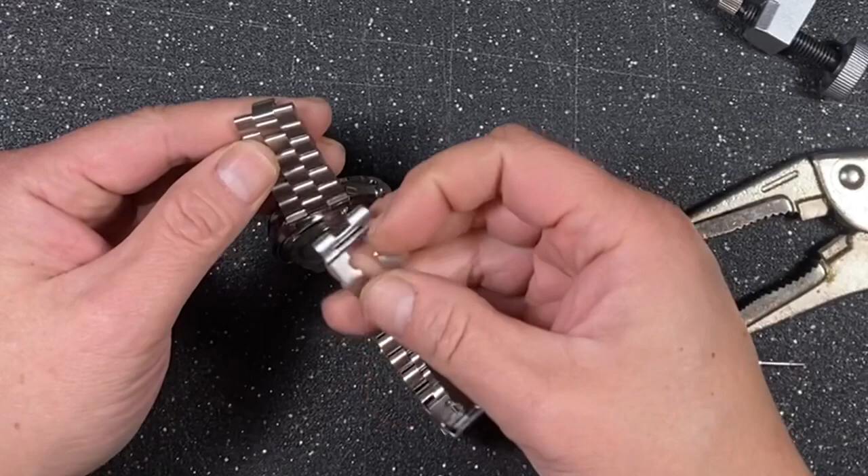Alright, so time to put it back. See, which way was it? Oh, I can't remember, do you guys remember? I'm guessing we slide it in this way. We'll see what happens. Does this look right? I don't know. I don't have a mallet, so I'm just using whatever I happen to have. Not in all the way, but we'll see. Now let's see how this is.

I could have it be a half link over this way, but it's not totally necessary. Let's see how many links to remove from this side. What do you think, guys? 2 links, or remove 1 and do a micro adjust? I'll remove 1 and we'll see how that goes. Just 1.

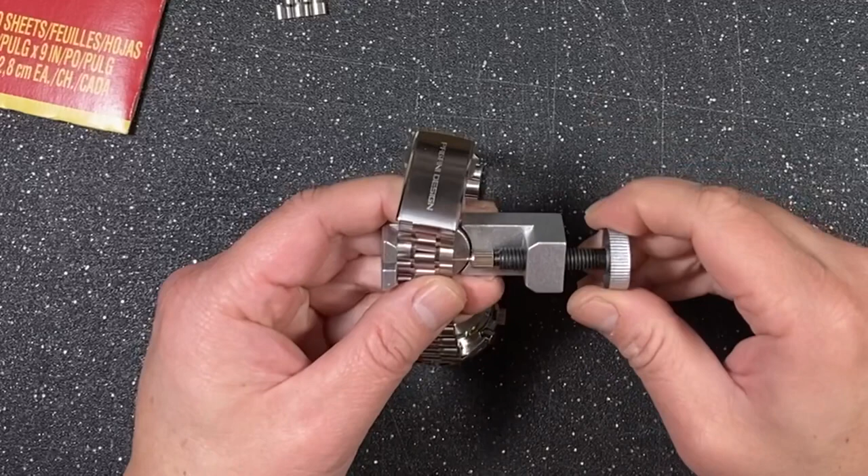Now the real Omega watches have a different system, so what you're looking at only works for this particular watch. Don't be like, hey, I can do it like this to the other watches—no, every watch has its own system basically. So you gotta pay attention to how it is fastened.

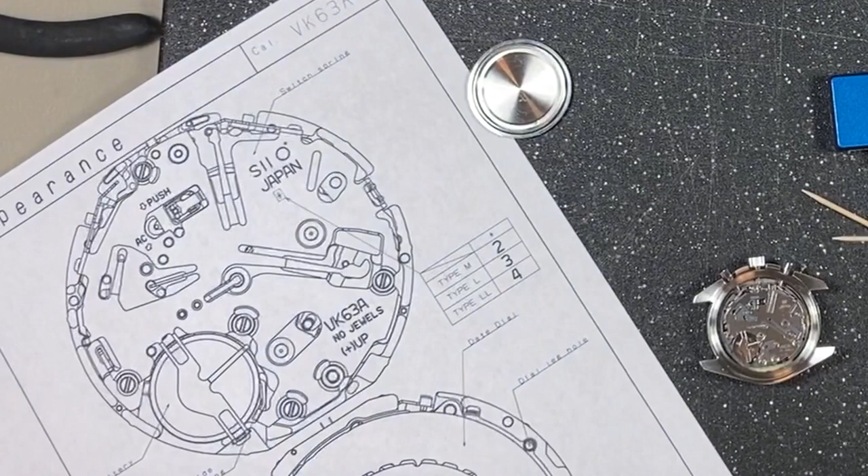So I'm looking at this here. It says push here, all right, let's give that a push. I see now, okay. Push it, push this way here like so. There we go, needed the loupe.

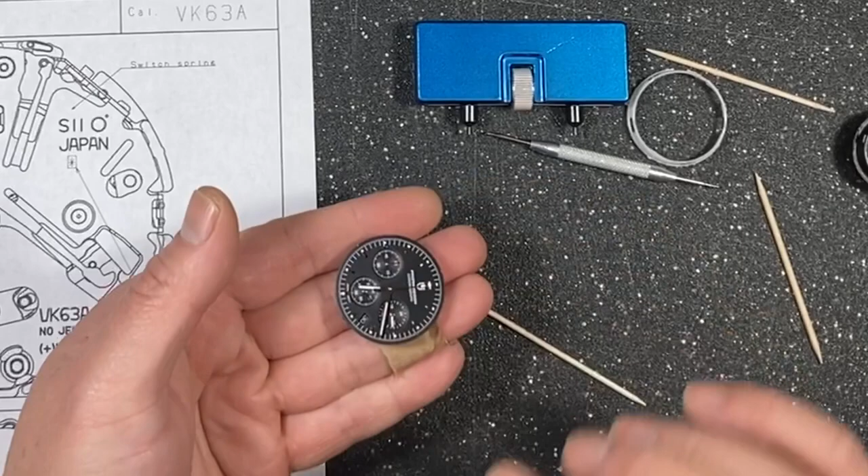Now because of these pushers right there, we're going to lift this side up first, and put it in this way. Now I'm not going to talk to avoid spitting on it.

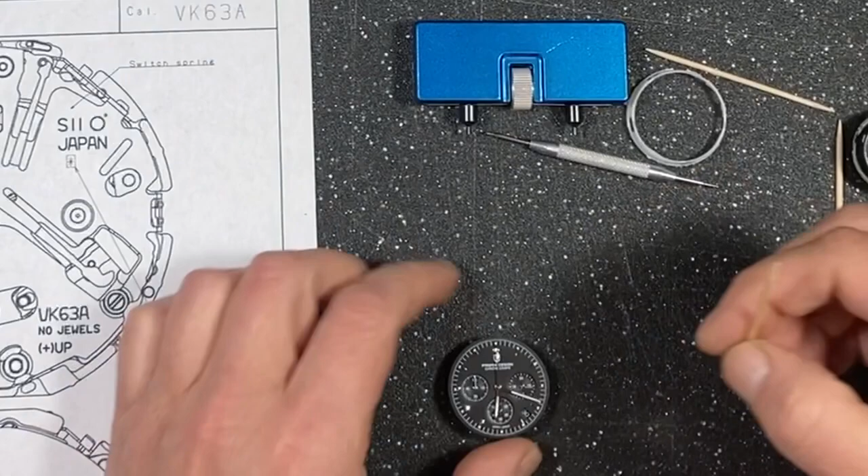Okay, this is not the type that you can just push over a little bit. So, you know what, I'm just going to leave it like that and put it back in.

Get it past the chrono pushers. I think the proper way would be to remove the hand, reposition it, and put it back down. But I don't want to do that, don't want to risk breaking it.

Put the pin stem back in. All right. Make sure there's no dust. Looking fine. Yeah, whichever. Now, had this been an Omega, I would have inspected it thoroughly and refused this for not being proper.

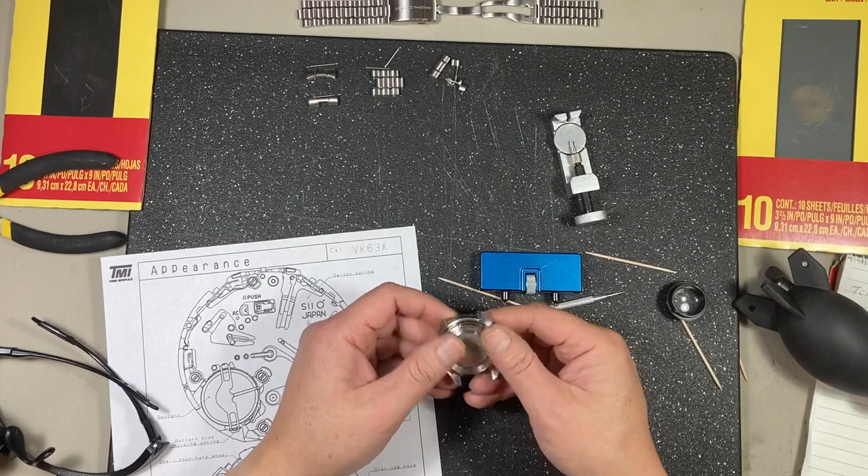Now, when sealing a case back, be careful not to cross thread the threads. You're going to want it to seal and go on smooth like this for many turns. Then you feel it kind of smooth out when it hits the gasket, and then you tighten it up with your tool.

Now the actual important part of this whole video is that we gotta make it wearable. So with all these really sharp edges, we're gonna tone it down with some 800 grit sandpaper. They're not expensive, you can get it at any hardware store.

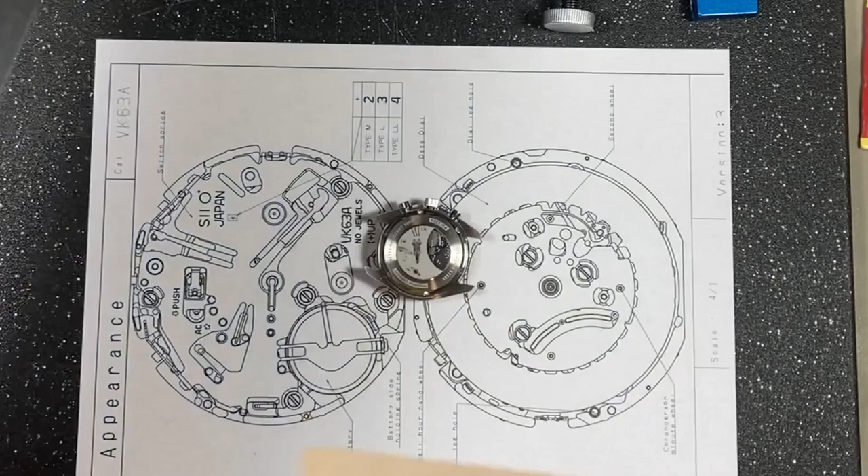Just gonna fold it over once or twice, a bit like such here, and just go over the edges. So you want it to be crisp, but not sharp enough to cut you. Just dulling it down so it doesn't feel sharp, and that's it.

No need to put a big smooth edge on it like some people do. They just make it way too smooth, and it loses the crispness.

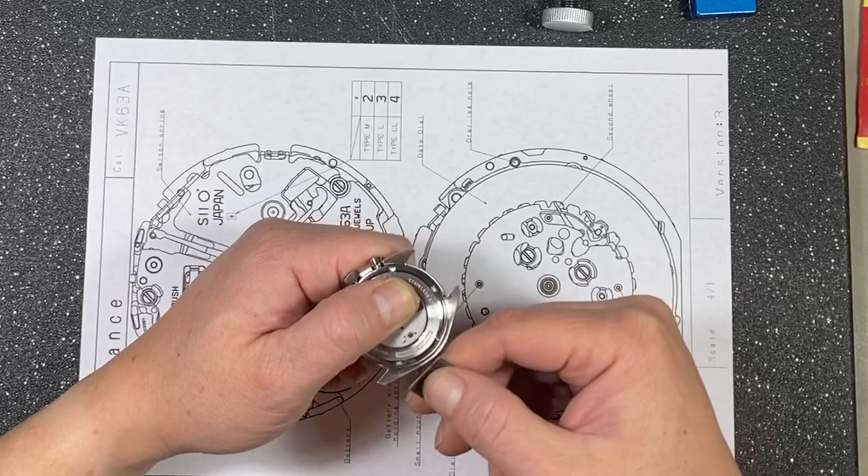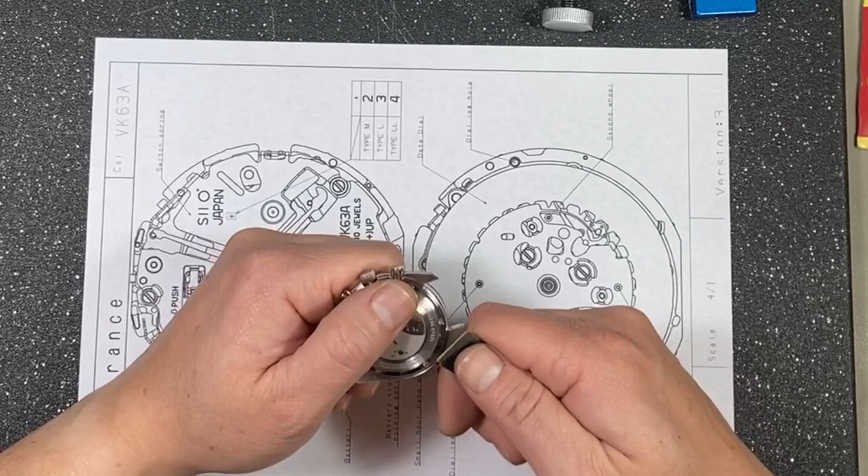It's okay if you slip now and then and scratch up the finish, because it just gives the watch more character. After all, you're doing it yourself. But if you're paying someone to polish your watch, I would be upset.

Okay, feels crisp, but not cutting my finger, that's what I'm looking for. Now this side's going to be a challenge because of the pushers.

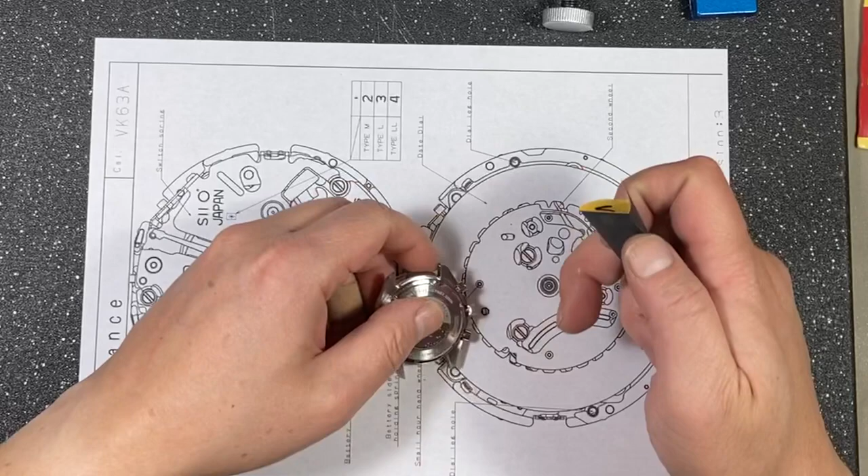Now in between is going to be a little tough, so I'm just going to fold a little edge like this to get the little in-between spot there.

Yeah, imagine how much you'll have to pay for this watch if the people who made it in China actually took the time out to do all this. Maybe $10 more, you know?

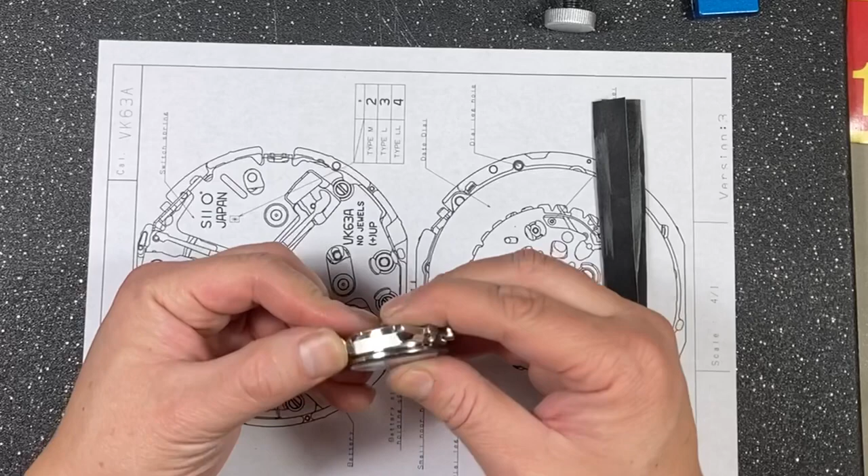Now let's feel the top. Top and sides feel okay, nice and crisp.

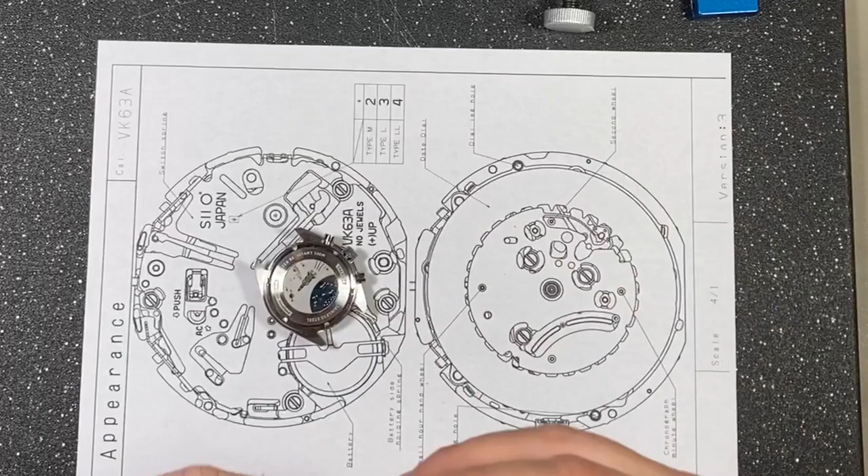All right, so now we're gonna move on to 1500 grit, just to refine the edges that you just finished doing here, make it even more smooth.

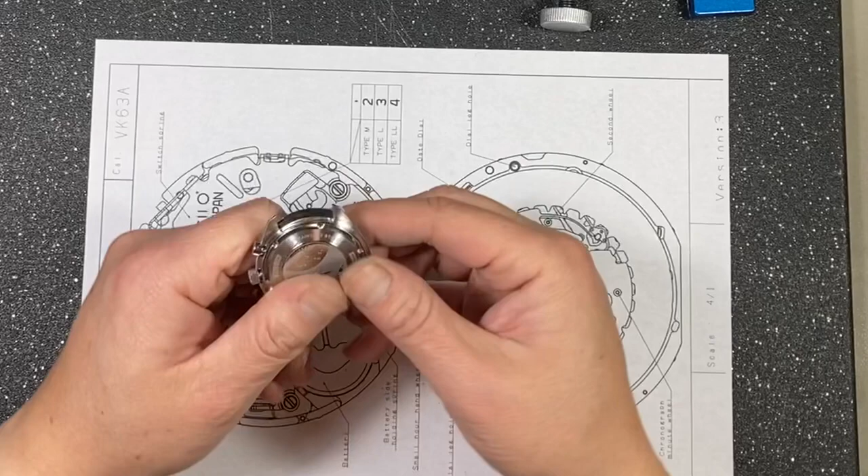Okay. It still feels sharp, but it's not very sharp. So that's the watch head. Hope I haven't broken it. Yep, okay.

Oops, I forgot, make sure your crown's closed before doing all this. You don't want to get dust inside. Whoops!

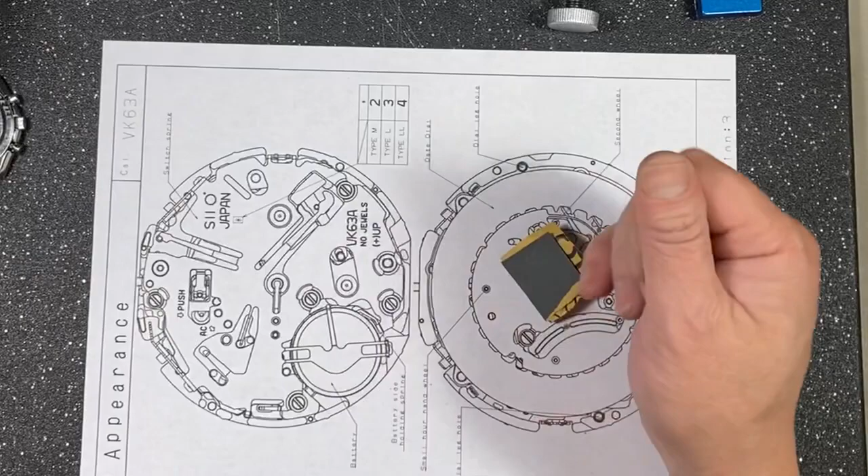Yeah, okay, now for the bracelet. Get the 800 again. I'll start with the end, no, I'll start with the clasp, get the clasp done out of the way here. Again, don't let this fly away.

Yeah, this needs some work over here, not so much the top, but this part right here.

Feels like aluminum. Okay, good.

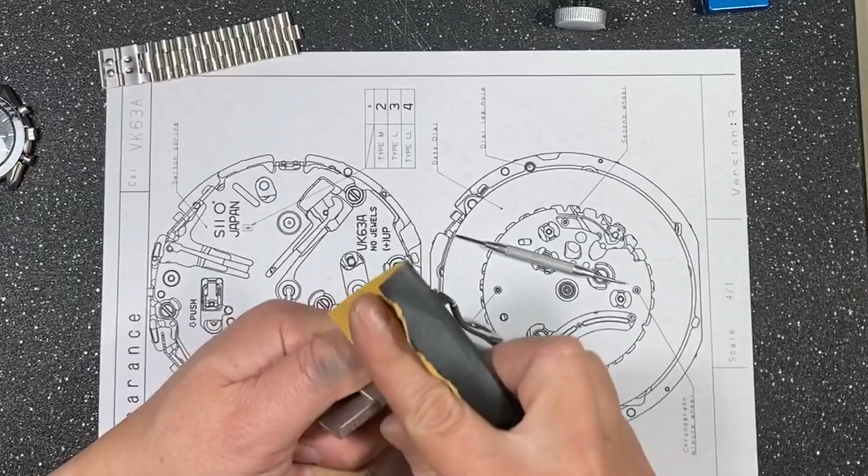On this side here, this is powdered metal that's gray. Okay, feels okay now. This right here is scratchy.

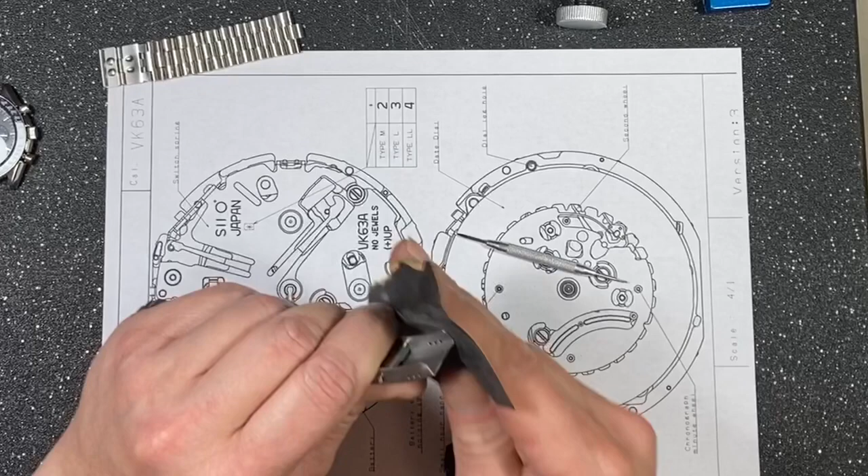Okay. Ah, this side over here.

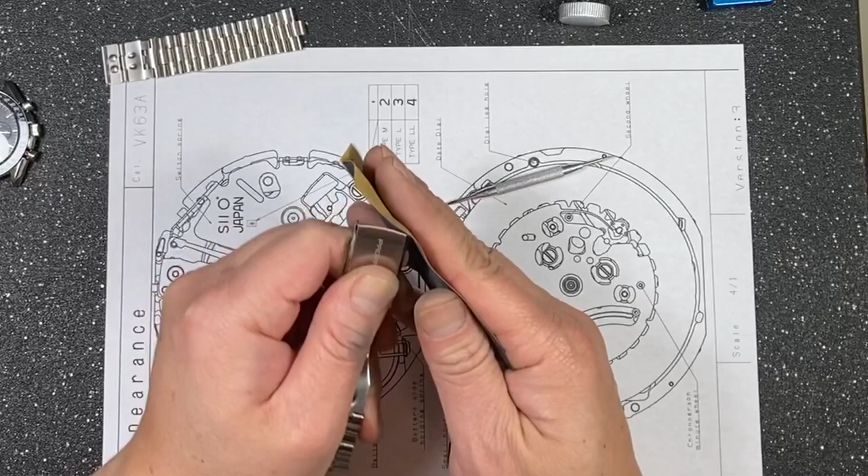I'll tell you, earlier before I went to get a COVID test for this stupid job I got coming up - I mean, the COVID test is stupid, right? So over there, there was a lady waiting, a white lady, and then I was waiting. The guy says, 'Hi, can I please have Danny and Stephanie follow me?' So I went first, I was following the guy, and he turns and points his finger, 'Okay Danny, you'll be going in here.' And I said, 'Oh, I'm Stephanie.' And he goes, 'Oh, you're Stephanie, right?' He knows I'm joking, I know I'm joking, I know he knows I'm joking, he knows I know that I'm joking, right? So I go in where he pointed.

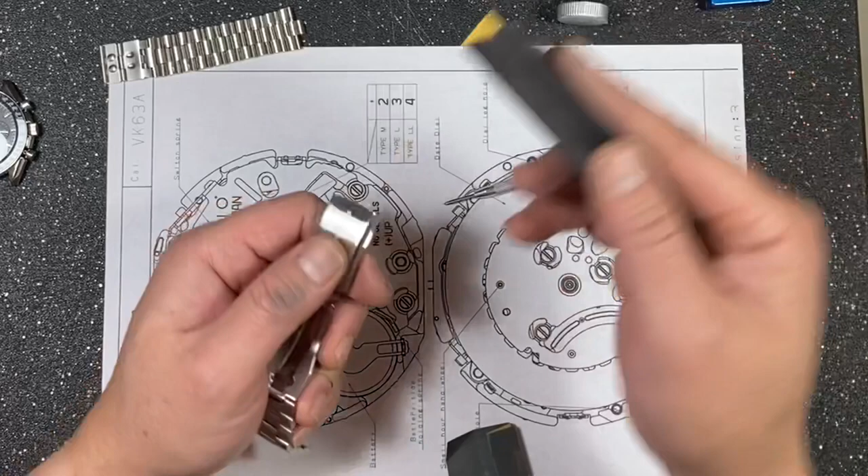Immediately the white lady goes, 'I'm Stephanie.' And then the guy said to her, 'Yeah, I know, he was just kidding, he was just kidding.' And then after the swab I came out and I saw her, she was not happy. She had a look on her face like, grrr, like are you kidding me? Come on man, live a little. No sense of humor, these people. She goes, 'I'm Stephanie.' Like... I don't know man, I just don't know.

Is this thing still rolling? Yes it is, it's been an hour and 2 minutes. Jesus.

Alright, now some finishing touches with the 1500, just to smooth it out. Okay, top part of the clasp is done. Now I remember it has some scratchiness over here, so gonna do it here.

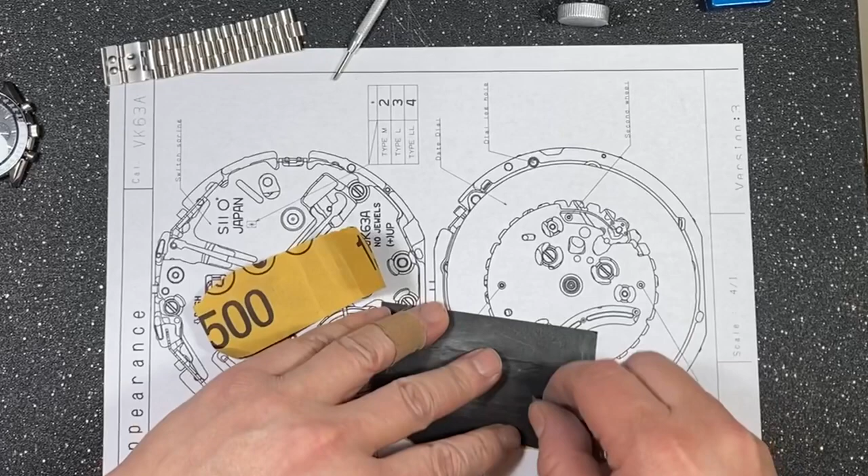Still feels scratchy, why? There we go.

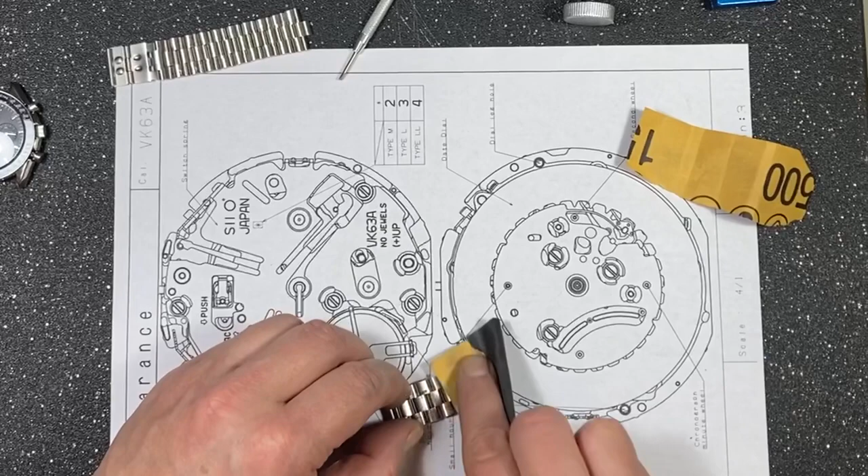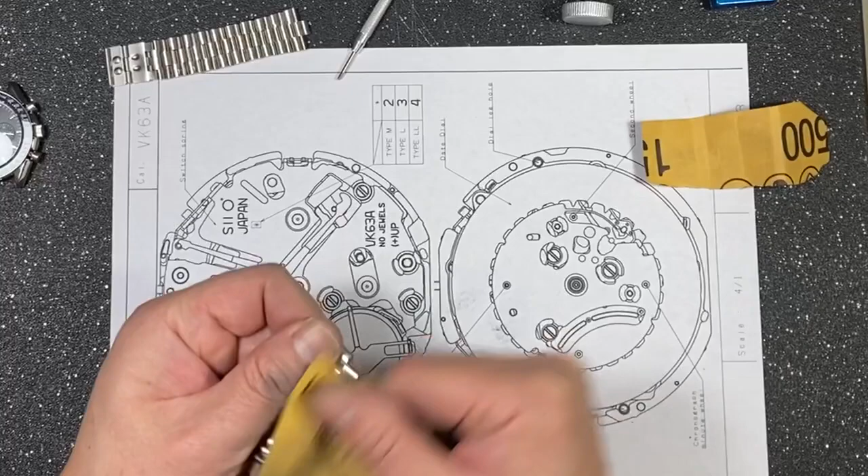I don't think it's an improvement. Very scratchy bracelet. Maybe if I learned sandblasting or something, maybe that would have helped. I like to use all the sandpaper before I swap it out.

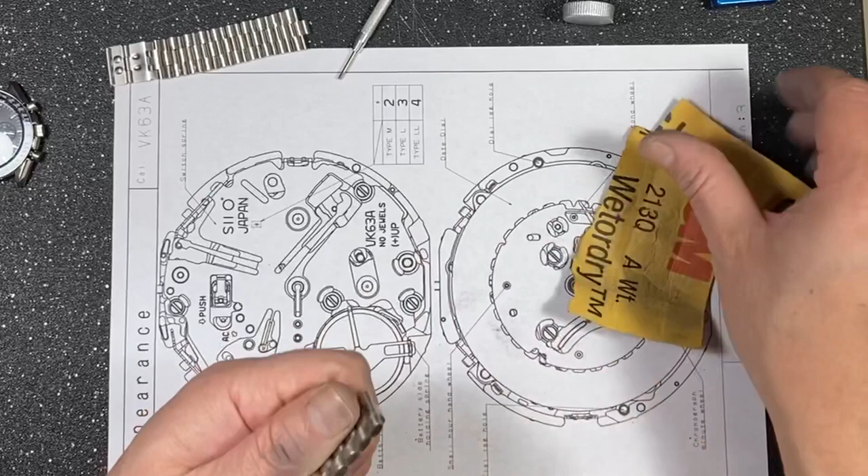Okay, carefully. So sharp edges right here. But hopefully this will be inside the clasp so it doesn't bother me, but I'll run it through anyway.

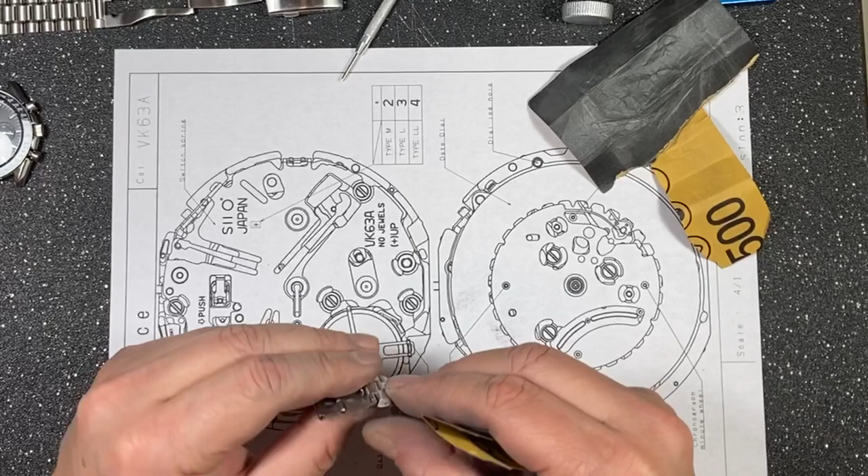Oh, time for a new piece of sandpaper. Sandpaper. So some really sharp edges. Only if you guys can see how sharp this is, really sharp edges.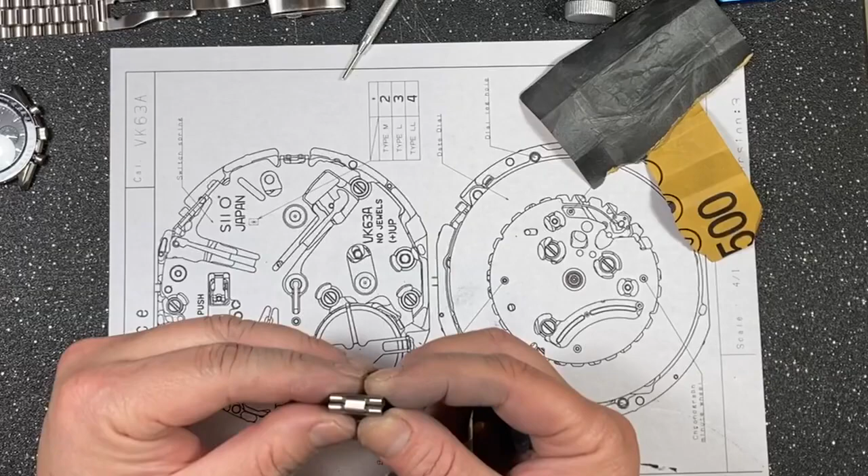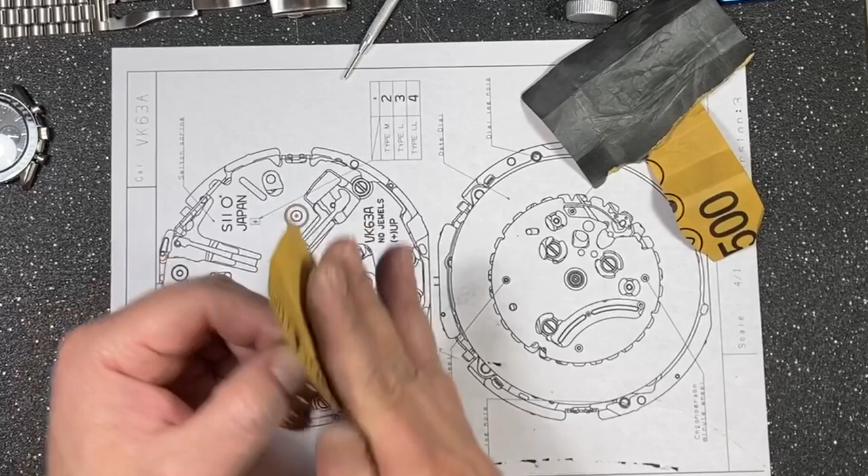If anyone asks, I can tell them that the value of the watch is like 500 bucks, after all this labor I put in.

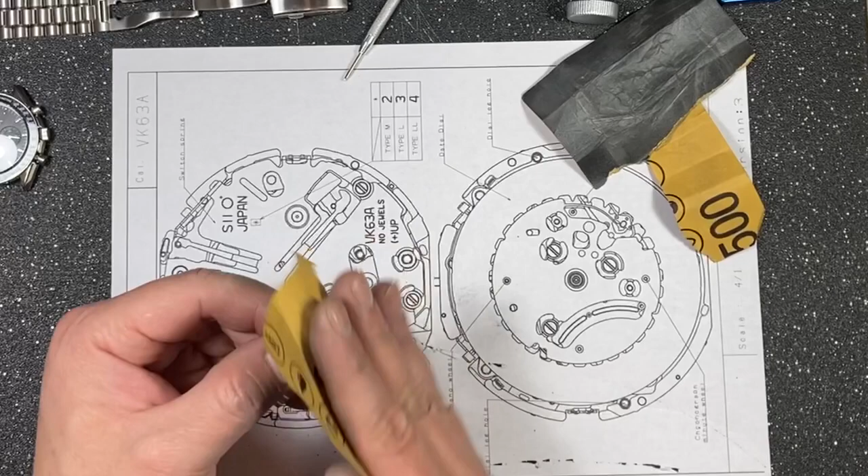I'm getting lazy, I'm beginning to feel like I want to cut corners.

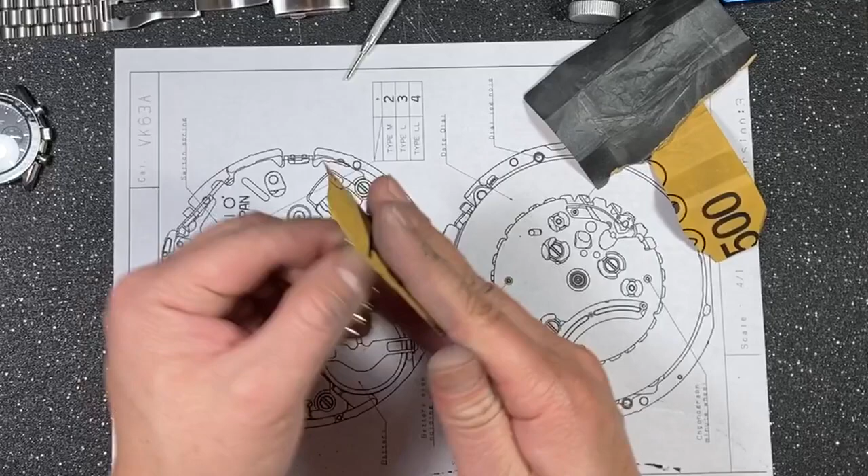This is tiring. You may have to wait a month before my other watch video comes out of the Aquaterra homage, because I'm getting a little sore, I need to recuperate.

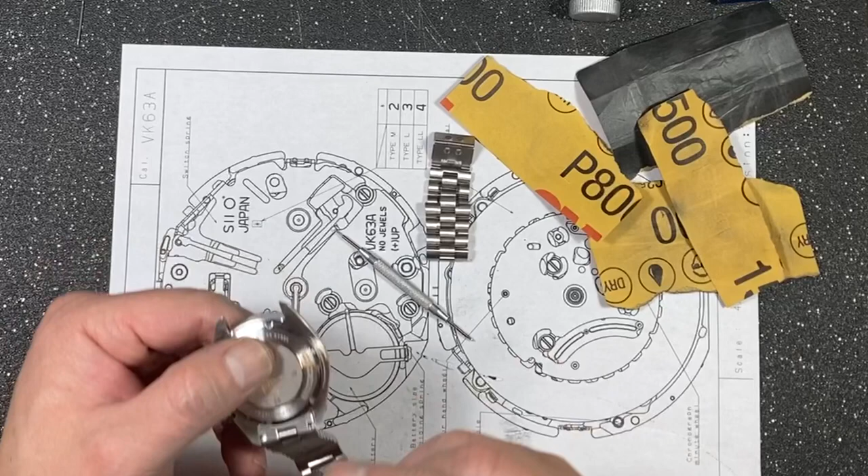Is it in? I don't even know. I guess it's in, I'll check with the loupe, see if the shoulders have hit the edge of the metal. Yes for one side, yes for the other. Right, that was the bottom, right? Yes. Now for the top.

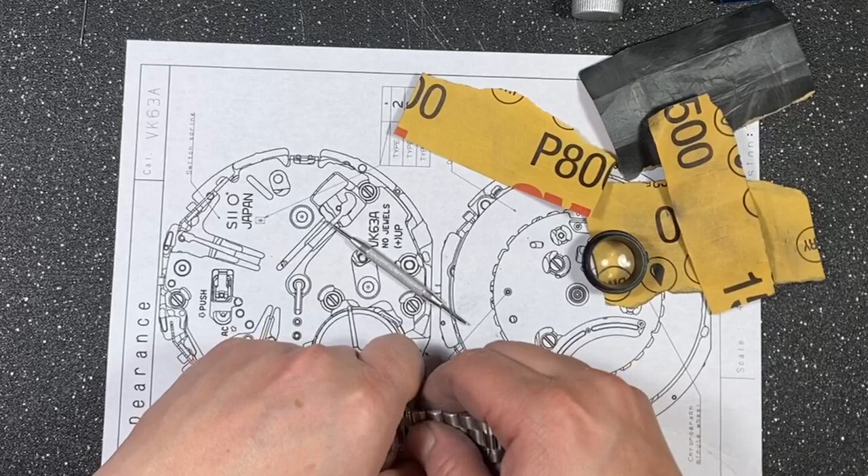Do not let it fly across the room, guys, it will happen. Check the spring bar position. It's barely in. And it's in.

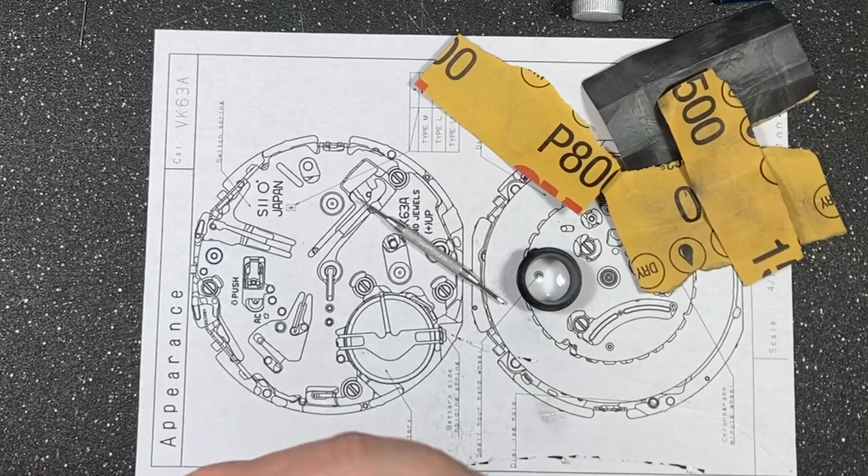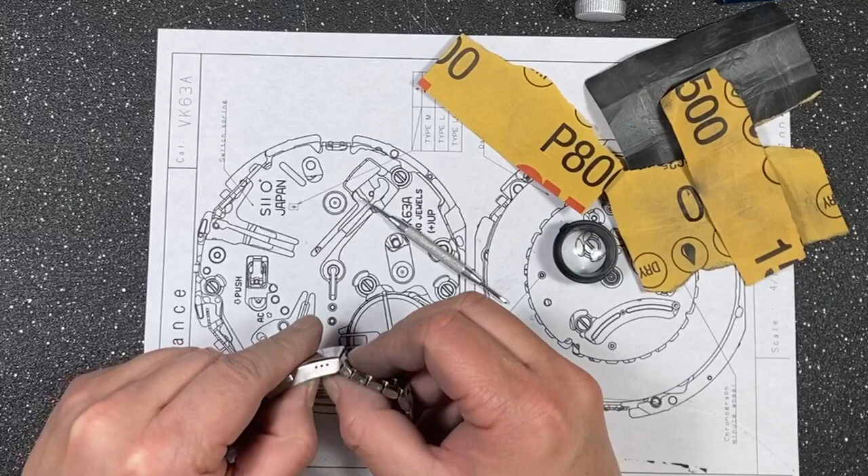The micro adjust. One is in, and both is in. Alright, so as you can see, the watch is now ready for wear.